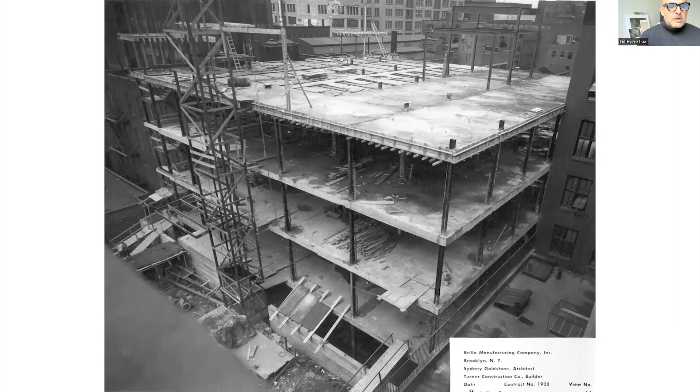It's a very simple daylight-type factory, where basically all around the perimeter of the building there are big windows. However, the windows are positioned 5 feet above the finished floor, so machinery could be placed at the perimeter and people could actually work using natural daylight.

Obviously the neighborhood has changed, and we were asked to convert this building from a daylight factory manufacturing the former Brillo product, which is basically metal wool, into apartments and residences.

So we worked with landmark preservation in trying to adapt the facade and enlarge the windows, taking care of the facade so the building could become a residential building. We worked with Landmark to lower the windows so people could actually sit down and look at the street outside. Here you can see this special window, which used to be a bridge for transfer of goods.

We also added two stories above the mass of the building, so it wouldn't be visible from the public way. We set it back by 15 feet, and obviously the addition is much more open.

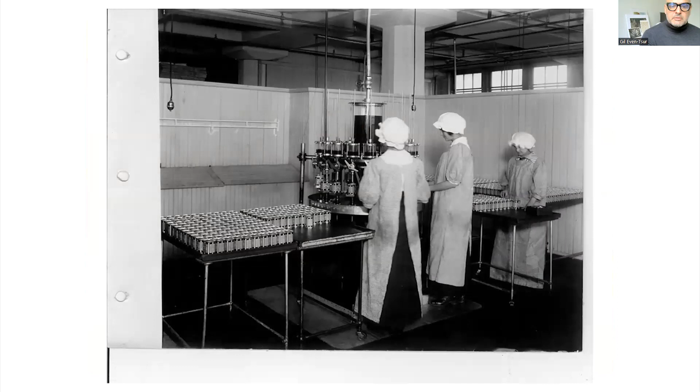In Baltimore, we were asked to work together with Pompeian Olive Oil, a wonderful organization, the first historical olive oil importer to the United States. The owner of Pompeian Olive Oil is a man of great vision, and he asked me to convert a 19th century storage space into a visitor center, a place where people can come to taste and enjoy the knowledge of olive oil.

This is the storage space, which has a kind of raw concrete floor, steel columns, a brick envelope, and a wood ceiling.

We make place for a beautiful ancient amphora collection that the factory has, and we find places within the visitor center that still allow it to walk through and create a dialogue with the old amphoras. There's also a tasting station where people can come and taste olive oil.

There's a very specific way of designing such rooms. Under the shelves there's a red light, based on the idea that the senses are connected - vision, smell, and taste. So in order to really taste the olive oil, one needs to blur the color so it won't affect the taste. There are very specific rules for designing these tasting stations.

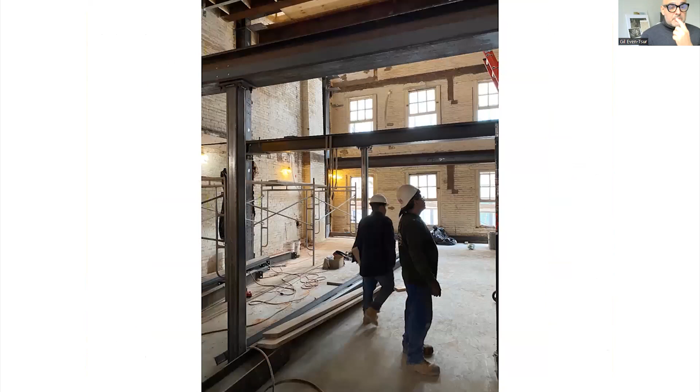We went through a very long landmark conversation and dialogue, which I loved, and together we came up with a concept for the project. This is a view from Leonard Street, and here we can see the garage building that wraps around the corner between Leonard Street and Varick Street. That's the view from Varick Street. Some images from the construction.

We're introducing a completely new interior structure to the building to meet earthquake code and fire code. There's a beautiful cornice to the building that we are cleaning up and maintaining. We're going to repoint the entire brick facade and work on the facade and the lintels that need work, and the windows, which we're going to double glaze but obviously keep the original patterns of.

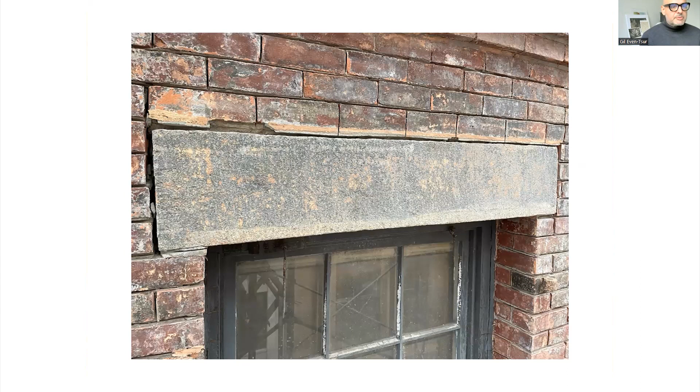As we work with Landmark, we also focus on materiality and the overall tones of the building. This is an image from the interiors.

The last project I'm going to show you, which I'll dive into a bit deeper, is a very important project to us - a great collaboration with master cellist Amit Peled. He's a professor at the Peabody Institute in Baltimore, and he has this great vision of bringing classical music to different parts of Baltimore, to lower socioeconomic layers of the city. He connected with patrons who were gracious enough to purchase the building, which was a metal bending factory from the 19th century, and he approached me to work together on this project with him.

The idea is that the students or musicians will actually live on the campus, and the building will be able to open its gates to the neighborhood and become part of it. That way, people will get exposed to the events and the life that this building will create.

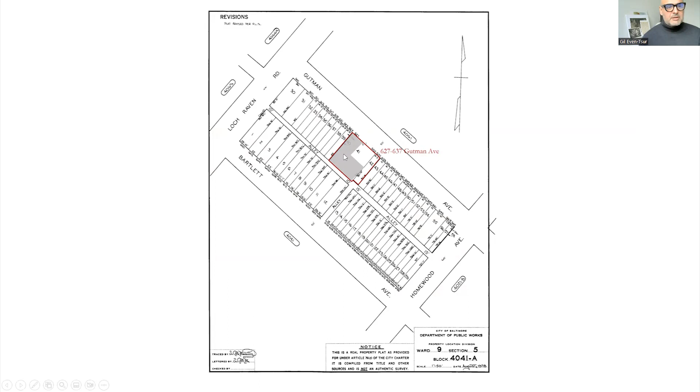The building is on Gutman Avenue, which is a very mixed area - you can see the train rails running through, a band of old factories, and some residential blocks. Interestingly, the building sits within a residential block, but there is one lot which is bigger, and the factory was basically within a residential block, which is highly interesting.

The building is a simple brick factory with very little openings. It's run down and has been abandoned for quite a long time. By the way, most of the buildings on the street are abandoned.

As you can see, the building has had a few interventions over time. Together with Amit, we came up with this narrative for the project: envisioning an architecture that communicates a sense of acceptance, an uplifting assembly of spaces, illuminating the complexity of the program.

And the way the street flows through. This is an idea of how this L-shaped architecture, with the music and the garden, and the connection to the street will happen.

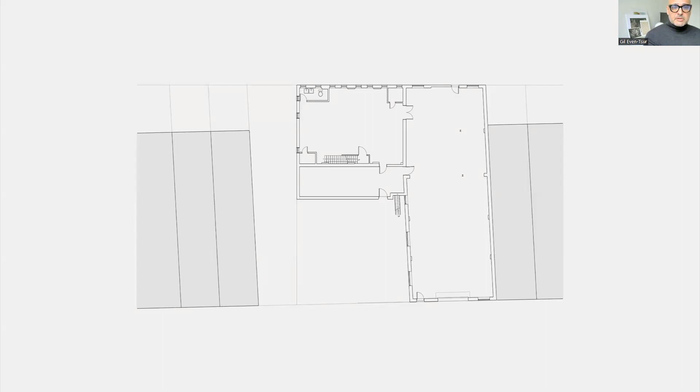So we sorted out the historical building and started to break the pieces that are less valuable, maintaining the ones that are more valuable within the historical fabric. Here we have the architectural assembly of the L-shape of the historical fabric, and the garden, and the way they start to speak to one another.

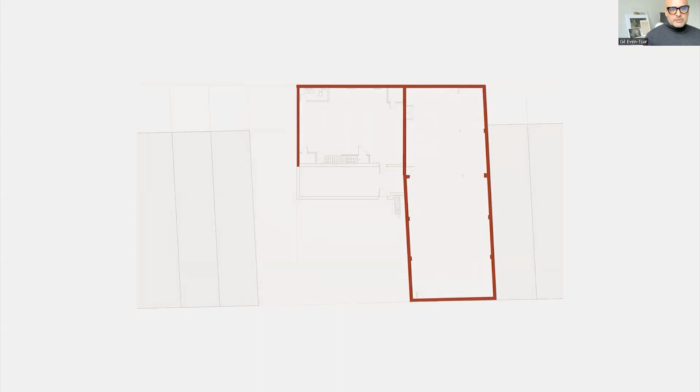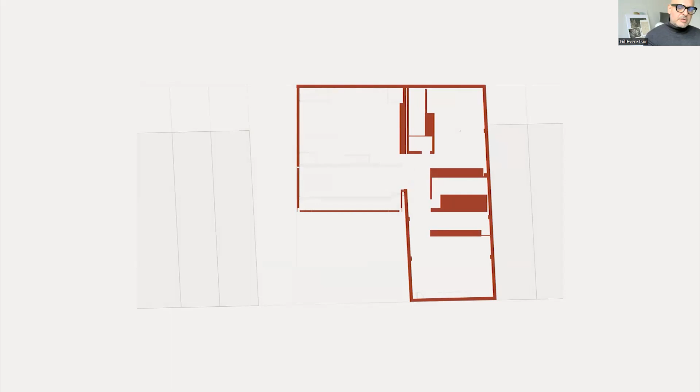We kept the historical brick walls that we felt were more valid, and removed the ones built later, mainly in the 70s and 80s, fabric that is not as valuable. We added pieces to it, halls, stairs, and other spaces.

We start to organize the public areas, the stage, the communal kitchen, and the rehearsal room facing the street. Then we analyze the way people will interact from the street with the project and the entries, so one can step into a garden and from a garden into the building.

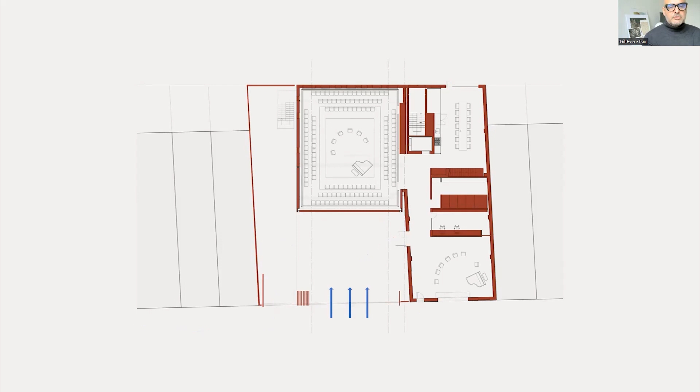The fences can open up and start to have the street get into the building and into the garden. This is an idea of the way sound will flow through the building, and how the building opens up at times of an event, with the stage extending out into the garden.

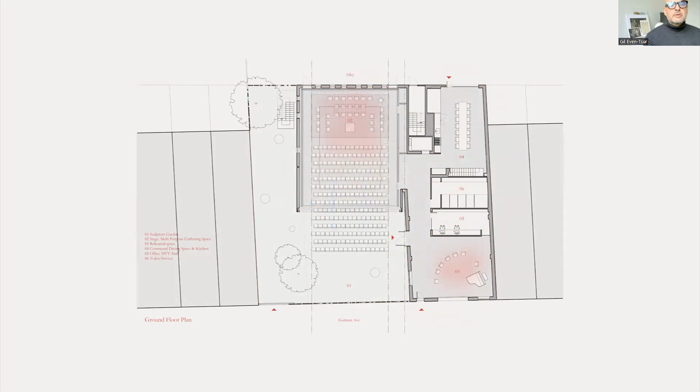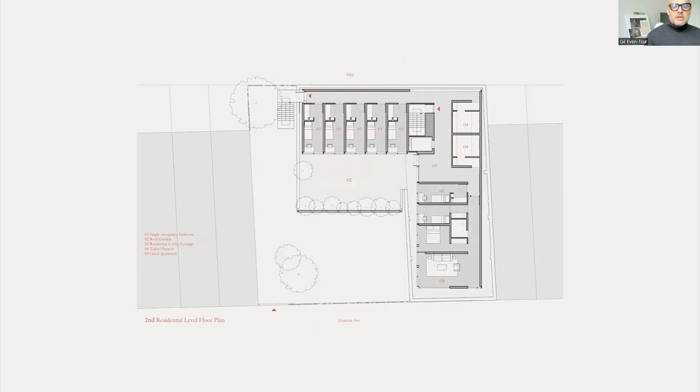There are a couple of formations that can happen, and there's a really nice mezzanine that people can climb up and look down from, a place for the musicians to mingle. This is the modern addition, where we have 14 units for the musicians, private rooms, sort of like a boarding school assembly.

And this is the building. Here we see the old factory and the context alongside the new addition.

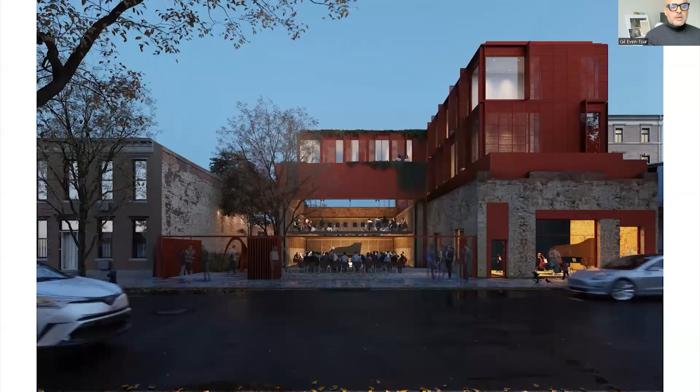The building can open up at times of events and create this wonderful square and openness on one hand, and the way the music flows out into the street, and the garden that at times can be closed, and at times can be open to the people.

We can see how the building is able to open up and allow people to sit down and enjoy a concert. This is the stage room, where one can see the old and new architectural assembly happening, the brick shell and the carefully placed steel and wood new assembly.

These are the building sections. There's a very delicate connection between the more intimate spaces and the stage space and the rehearsal spaces. The building can open and close to allow for an acoustical separation between the different spaces.